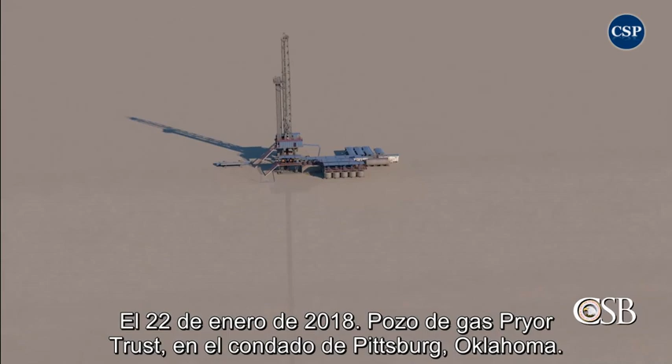January 22, 2018, the Pryor Trust gas well in Pittsburg County, Oklahoma. The well was operated by Red Mountain Operating, LLC, which contracted the Patterson-UTI Drilling Company to drill the well.

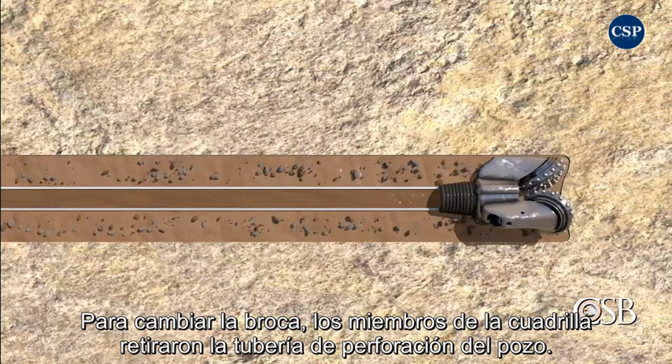In order to change a drill bit, crew members removed the drill pipe from the well. Approximately 3.5 hours later, a blowout and rig fire occurred, killing 5 workers.

Industry best practices recommend having 2 protective barriers in place at all times during drilling operations. But our investigation into the incident at the Pryor Trust well found that both of those barriers failed. The safety management system utilized at the well was simply not effective, and the result was a catastrophic blowout and fire.

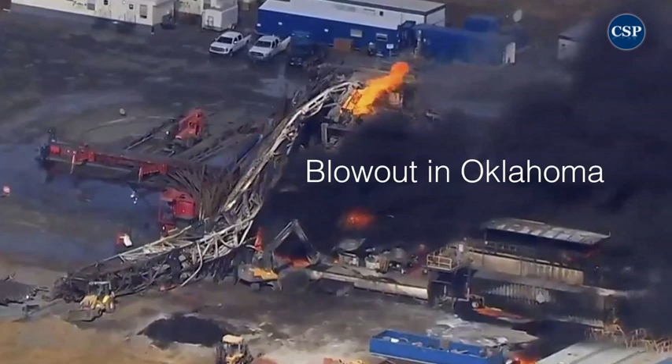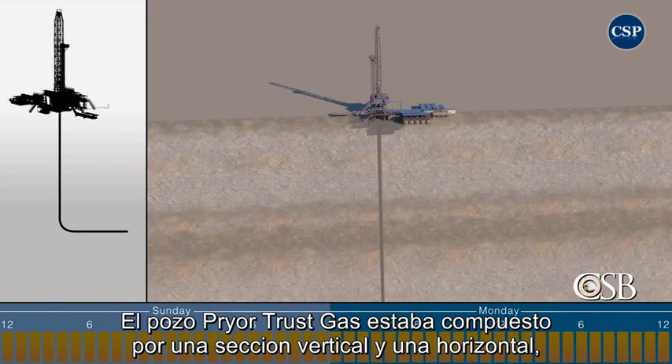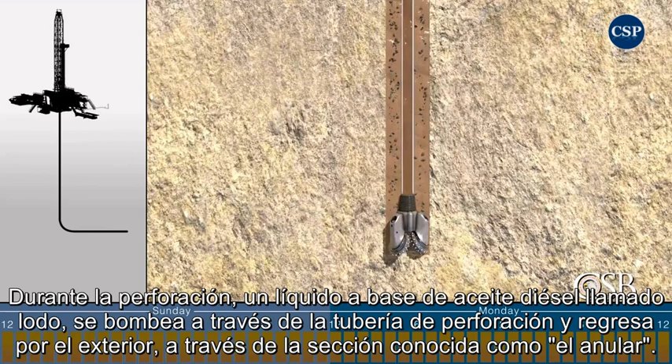The Pryor Trust gas well was comprised of vertical and horizontal sections being drilled to reach underground natural gas in the Woodford geological formation. During drilling, a diesel oil-based liquid called mud is pumped down through the drill pipe and back up through the area of the well outside of the drill pipe, called the annulus.

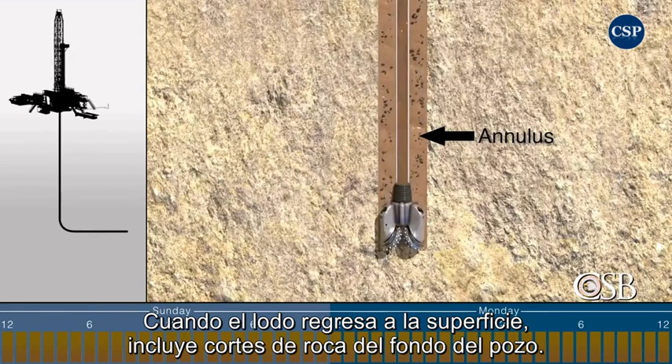When mud returns to the surface, it includes rock cuttings from the bottom of the well. Mud, however, has another important function. It is designed to add pressure to the well so that gas within the exposed geological formation is unable to enter the well during drilling.

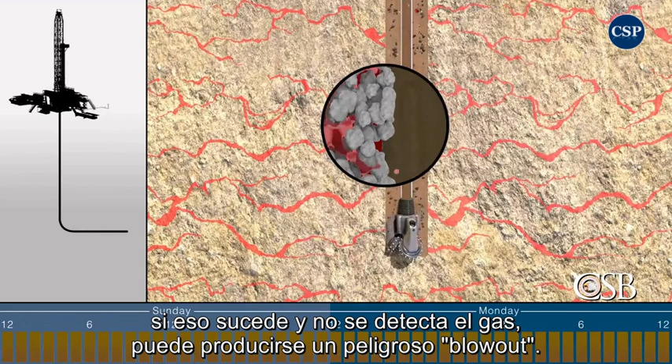If that happens, and the gas is not detected, it can lead to a dangerous blowout. On January 21, 2018, Patterson crew members had been drilling the well for 10 days under the supervision of 2 contracted representatives from Red Mountain. They were drilling the horizontal section of the well.

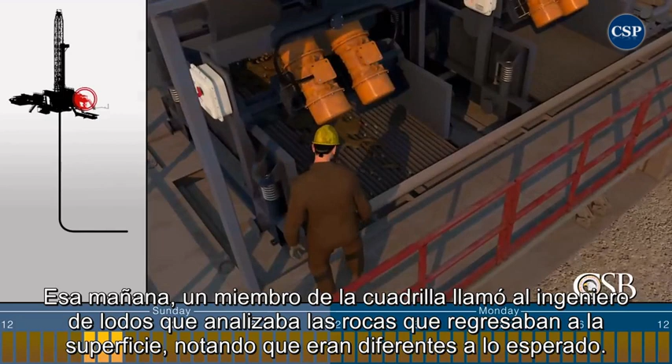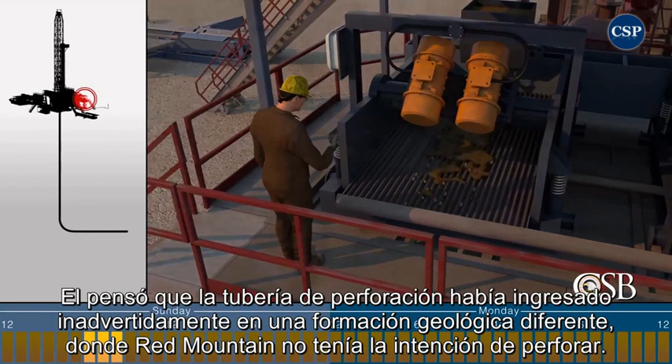That morning, a crew member called a mud logger studied the rocks returning to the surface and found they were different than expected. He believed the drill pipe had inadvertently entered a different geological formation where Red Mountain did not intend to drill. Shortly after, gas started to escape from mud returning to the surface.

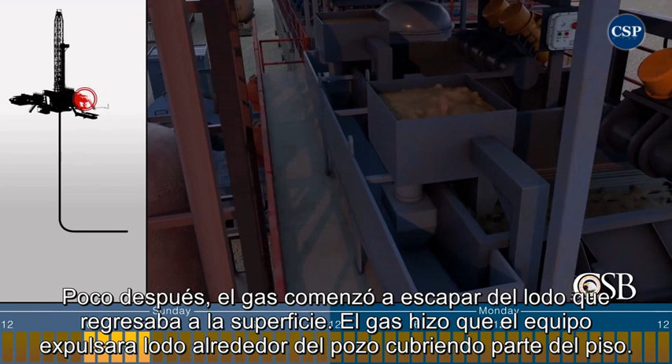The gas caused mud to spit out of equipment near the well and cover a portion of the rig. Around 11 a.m., the drilling crew adjusted piping so that mud returning from the well was routed to a piece

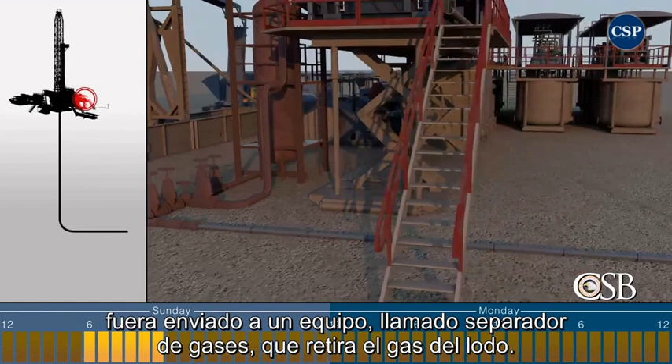of equipment called a mud gas separator that removed the gas from the mud. The separated gas was then routed to a flare to safely burn it.

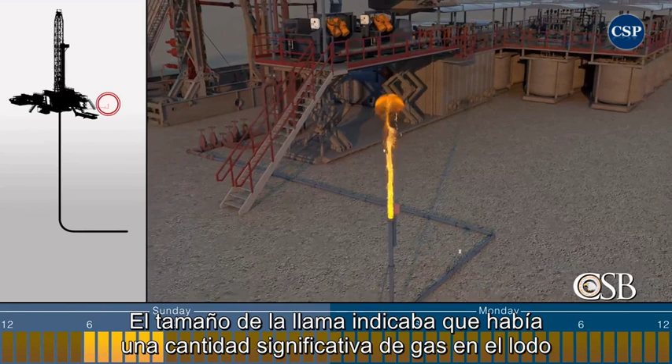The size of the flare indicated that there was a significant amount of gas in the mud and that the well had likely become underbalanced, meaning that pressure from the mud was not keeping gas out of the well as intended. The crew continued drilling underbalanced until 3:30 p.m.

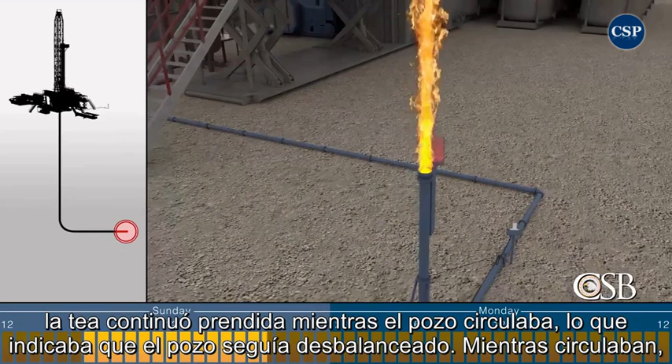when they stopped because the drill bit had become worn and needed to be replaced. The crew first circulated the well for 3 hours by pumping mud down the drill pipe and up the annulus. The flare continued while the well was circulating, an indication that the well remained underbalanced.

While circulating, the Red Mountain representatives discussed how to remove the drill pipe from the well in order to replace the drill bit. The process to remove a drill pipe is called tripping.

During any tripping operation, mud is pumped into the well to replace the volume of drill pipe being removed, which prevents gas from flowing into the well.

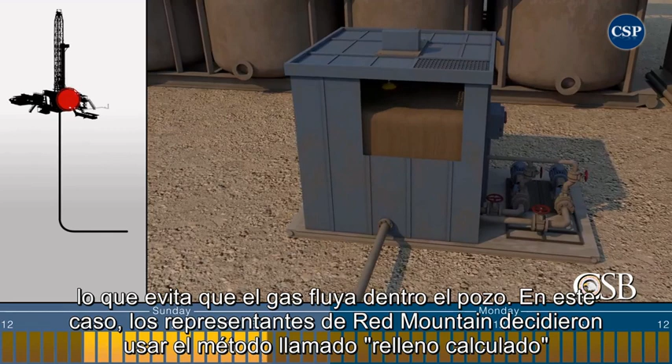In this case, the Red Mountain representatives decided to use a tripping method called calculated fill, which involved periodically pumping a calculated amount of mud into the well as the drill pipe was removed. They believed this method would keep the well contained if gas entered during the operation.

But it was not a standard tripping method during normal drilling, so no one on the Patterson crew had performed it before, and they had no written procedure. The crew started removing the drill pipe at 6:47 p.m.

The CSB found that while tripping the drill pipe from the horizontal section of the well, not enough mud was pumped and gas entered the well.

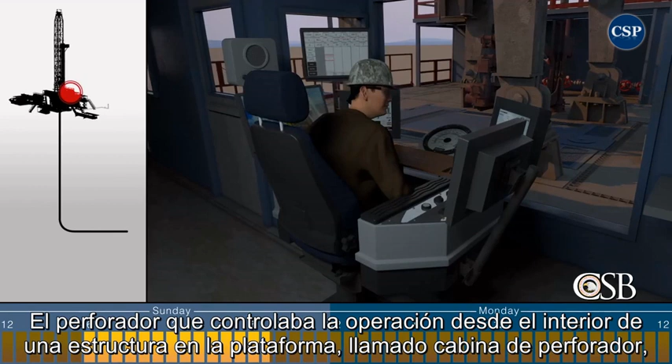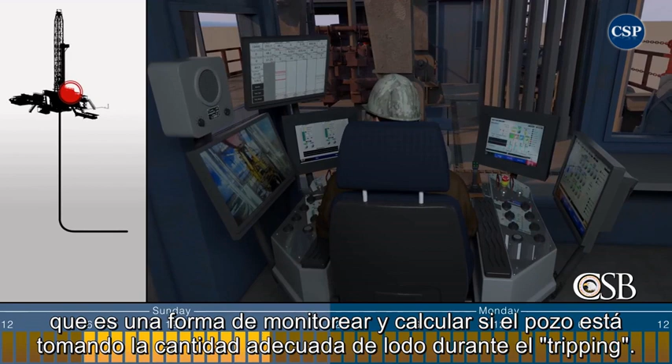The driller, who was controlling the operation from inside a building on the rig called the driller's cabin, did not see the discrepancy. That is because he had not been sufficiently trained on a new electronic version of a trip sheet, which is a form used to monitor and calculate whether a well is taking the proper amount of mud during tripping.

As a result, he was unable to see that a significant amount of gas continued to enter or expand within the well, causing pressure in the well to increase and mud to backflow into a tank at the surface called the trip tank. In fact, pressure at the surface of the well had increased so much that the centrifugal pump the crew was using was no longer able to pump mud against the pressure of the well.

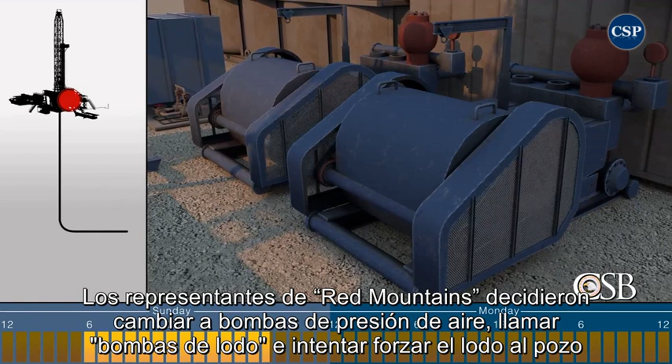Red Mountain's representatives decided to switch to higher pressure pumps, called mud pumps, to try to force mud into the well. They believed that the pressure applied by the new pumps would push any gas out of the well. But by the time the drill bit reached the top of the curve in the well, the CSB found that, unknown to drilling crew members, 20 barrels of gas had entered or expanded within the well.

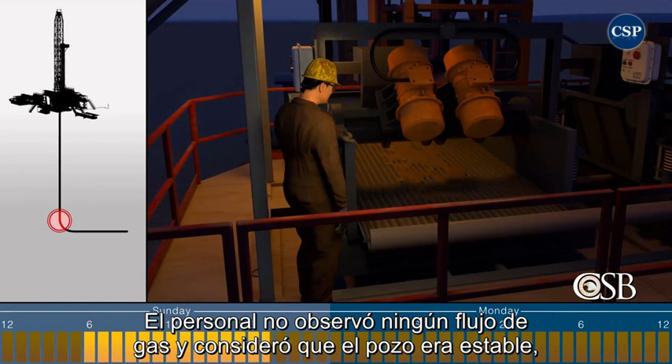At that time, the drilling crew performed a 45-second flow check to see if gas was flowing in the well. The crew did not observe any flow of gas and believed the well to be stable, but the CSB determined that the flow check was inadequate.

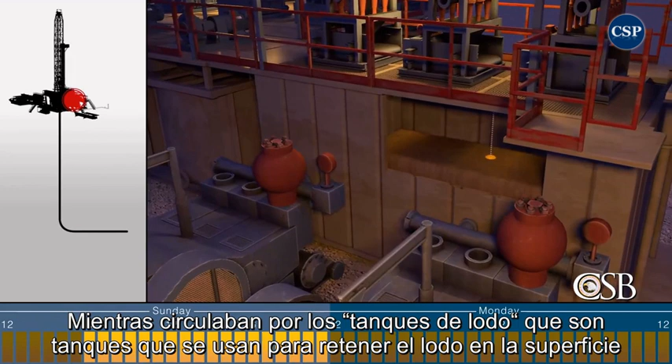At 11 p.m., the drilling crew again circulated the well. While circulating, the rig's mud pits, which are tanks used to hold mud at the surface and are equipped with level sensors, gained 14 barrels of mud when they should have remained stable. This meant that the well gained approximately 14 barrels of gas, which caused the mud to escape at the surface.

But the night shift driller had turned off the alarm system before the tripping operation, and no alarm sounded, so the large gain went unnoticed.

Red Mountain's representatives then decided to pump a weighted volume of mud, called a pill, into the well, meant to generate enough pressure to prevent gas from entering the well.

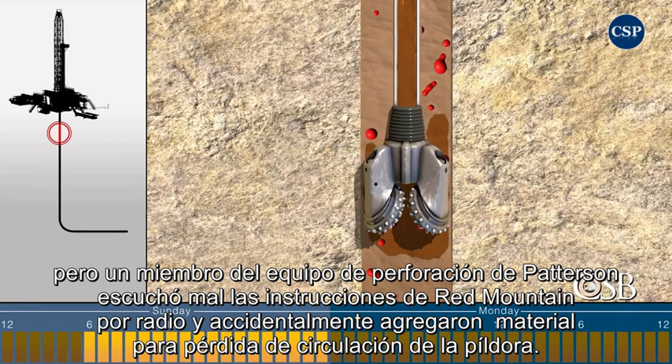But a Patterson drilling crew member misheard Red Mountain's instructions over the radio, and they accidentally added lost circulation material to the pill. This material is designed to clog breaches in the well and is not intended to be in weighted pills. Although the mistake was discovered, the pill containing the lost circulation material was pumped down to the bottom of the drill pipe, clogging it.

By 1:12 a.m. on January 22nd, the crew started to remove the drill pipe from the vertical section of the well, this time using the typical industry tripping method called continuous fill, where mud is pumped continuously into the well as the drill pipe is removed.

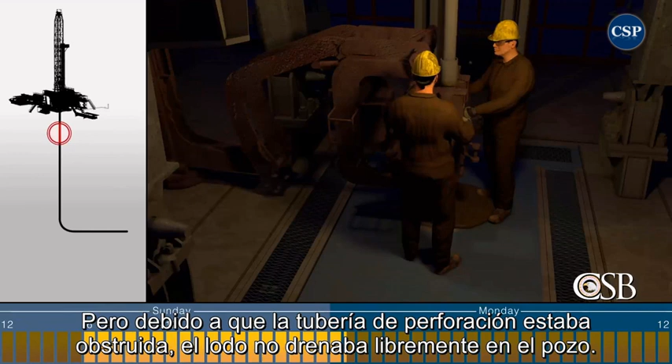But because the drill pipe was clogged, the mud was not freely draining into the well. The crew attempted to pump a weighted slug of mud into the drill pipe to push the clogged mud out, but this was not successful.

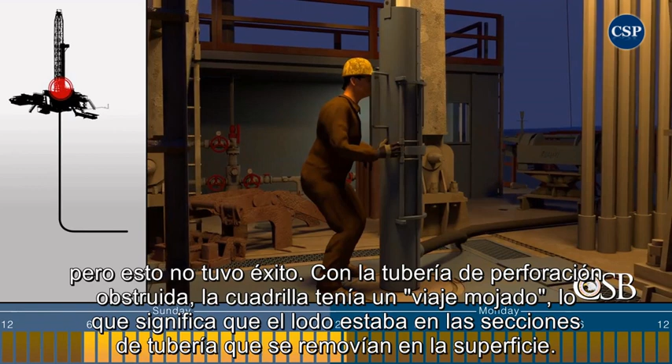With the drill pipe plugged, the drilling crew had to trip wet, meaning mud was in the pipe sections being removed at the surface. The drilling crew used what is known as a mud bucket to collect the mud from the drill pipe, which they drained into the trip tank.

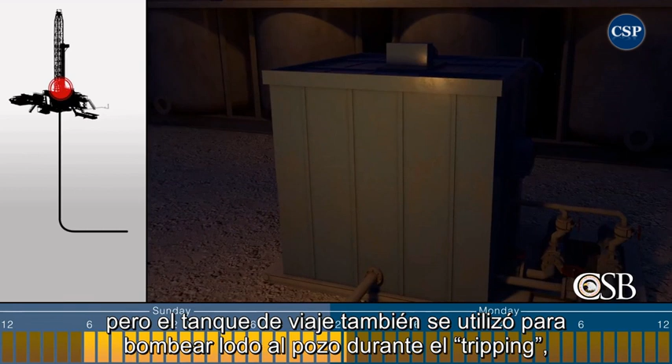But the trip tank was also used to pump mud into the well during tripping, so the trip tank volume started to fluctuate as mud was pumped out to the well and drained in from the drill pipe. The fluctuations confused crew members, and they did not realize that while the drill pipe was removed from the vertical section, the well gained another 23 barrels of gas.

When the bottom hole assembly, which is equipment at the end of the drill pipe that includes the drill bit, was near the top of the well, the crew finally removed the plugged part of the drill pipe. For the next hour, they tried to clear the clog.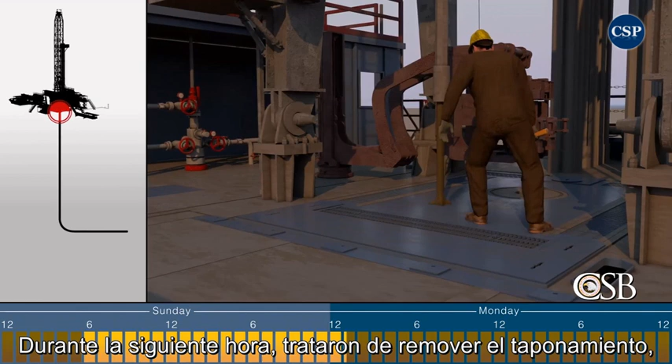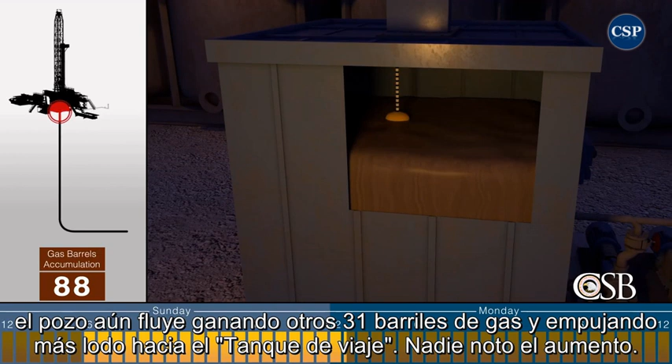But at that time, and during a subsequent shift change, the well was still flowing, gaining another 31 barrels of gas and pushing more mud into the trip tank. No one saw the gain.

At 6:10 a.m., the crew lifted the bottom hole assembly out of the well and closed the blind rams on the blowout preventer. They prepared a new bottom hole assembly for testing.

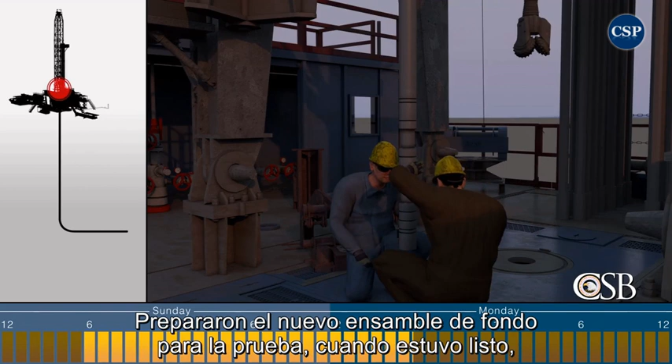When it was ready, a drilling crew member checked a pressure gauge on the rig floor to see if it showed pressure in the well, a safety precaution used before opening the blowout preventer. The pressure gauge showed no pressure.

But at 7:57 a.m., when the blind rams were reopened so the new bottom hole assembly could be lowered into the well, 5 barrels of mud surged to the mud pits.

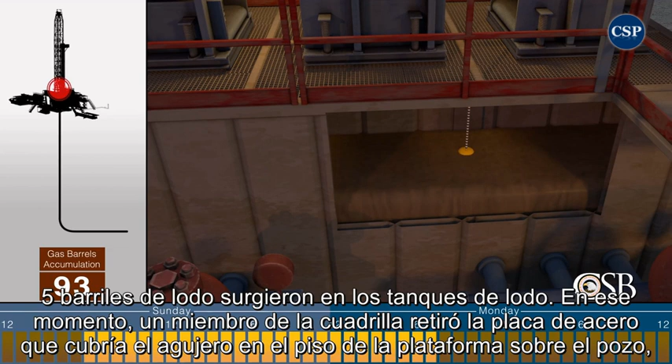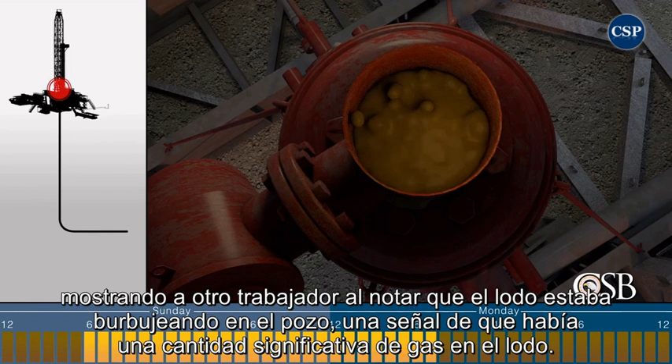At that time, a crew member pulled away the steel plate that had been covering the hole in the rig floor over the well. He waved over another worker who saw mud bubbling in the well, a sign that there was a significant amount of gas in the mud. That worker later told the CSB that he does not know if the mud bubbling was communicated to the driller.

Between 7:57 a.m. and 8:35 a.m., while the drilling crew was testing the new bottom hole assembly, the mud pits gained another 102 barrels of mud, a very large volume. This significant gain likely displayed on the driller's data screen, but the day shift driller also chose to turn off the alarm system, and it is unknown if the driller saw this dangerous gain.

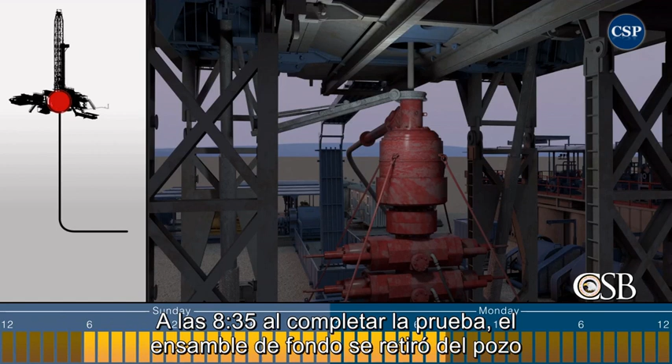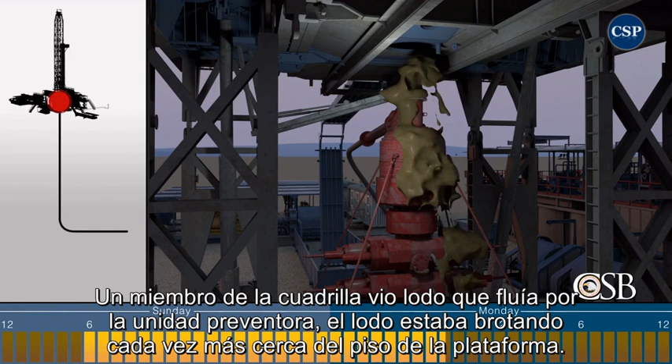At 8:35, with testing complete, the bottom hole assembly was removed from the well, and the mud pits gained another 12 barrels of mud, for a total influx of 207 barrels of gas into the well from the start of the tripping operation. A crew member saw mud flowing up out of the open blowout preventer stack.

The mud was shooting up steadily, getting closer to the rig floor. The crew member told the driller, and the driller responded that he was going to close the blind rams, but he never made it. Seconds later, mud blew upwards out of the well in what is known as a blowout.

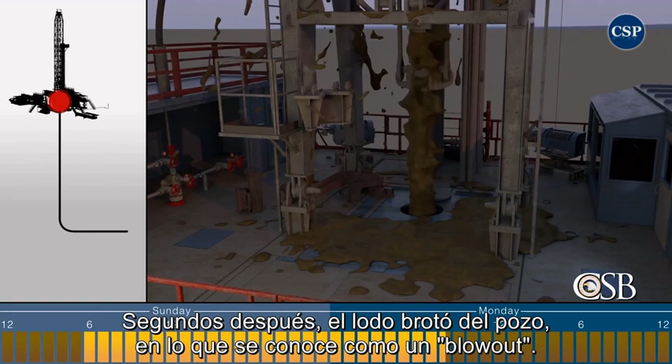2 workers on the rig floor ran into the driller's cabin, where 3 other workers were already located. The gas and mud then ignited, causing a massive fire. All 5 people in the driller's cabin were killed.

The blowout continued for hours until a well control services company was able to shut in the well around 4 p.m.

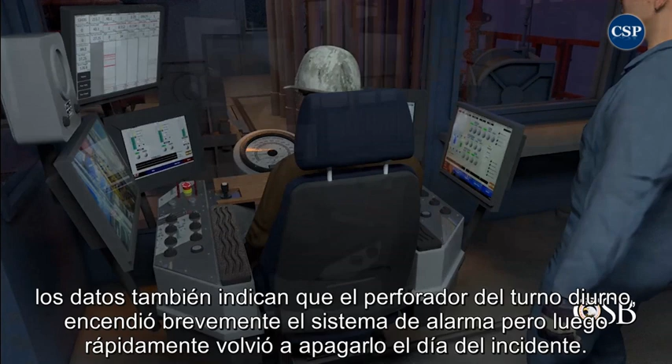During its investigation, the CSB found data indicating that on the evening prior to the blowout, the night shift driller turned off the entire alarm system. Data also indicates that the day shift driller briefly turned on the alarm system, but then quickly turned it off again on the day of the incident. Other than that short period, the alarm system was off for 14 hours, leading to the blowout.

We were not able to conclusively determine why the drillers turned the alarm system off. A possible reason is that the alarms were perceived as a nuisance or an annoyance. In fact, we found that had the alarm system been on, most of the alarms that would have activated during the 14 hours leading up to the incident likely would have been irrelevant to detecting the problems in the well.

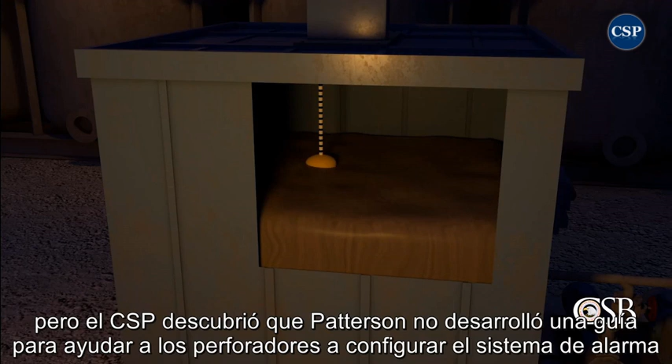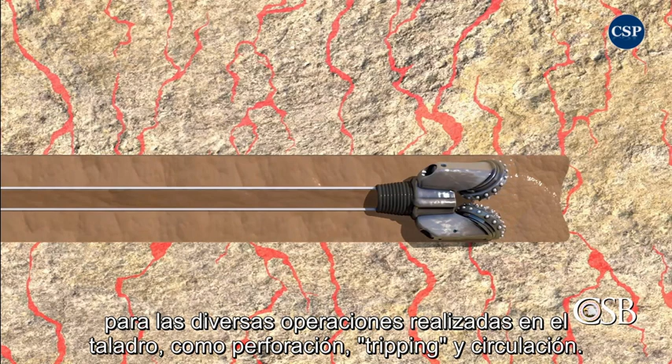For an alarm system to be effective, it must be configured so that the driller only receives alerts to conditions that require attention. But the CSB found that Patterson did not develop guidance to help drillers set the alarm system for the various operations performed on the rig, such as drilling, tripping, and circulating. Instead, to manage the alarm rate, both drillers apparently elected to simply turn off the alarm system.

We concluded that what's called a state-based alarm strategy is one way to solve this issue. For example, on a drilling rig, there could be different active alarms for each operation, such as drilling, tripping, and circulating, so that alarms critical to a certain operation do not become a nuisance when operating in a different state where those alarms are not needed.

Although there is a large body of guidance and recommendations on the design of alarm systems for hazardous operations, none are specifically targeted for the drilling industry. As a result, the CSB made a recommendation to the American Petroleum Institute to develop a standard on alarm management, specifically for the drilling industry, that addresses drilling's unique dynamic environment and provides guidance on implementing a state-based alarm system for different operating modes.

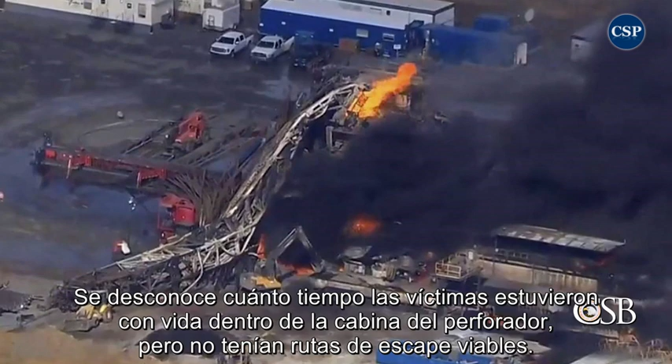When the blowout started, 2 crew members on the rig floor ran inside the driller's cabin. 3 other crew members were already in the driller's cabin, and all 5 workers were killed. It is unknown how long the victims remained alive inside the driller's cabin, but they had no viable escape routes. There were 2 exit doors from the driller's cabin, but both of those exit doors were blocked by flames.

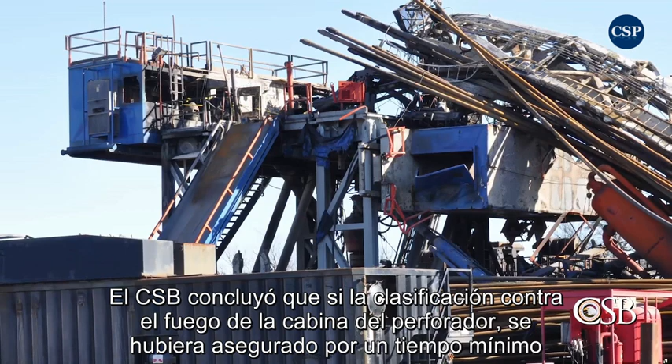After the gas and mud ignited, the CSB concluded that had the fire rating of the driller's cabin been ensured for a minimum time, with emergency escape options from the floor or from the back wall, there could have been a better chance for the workers inside to have survived this incident.

Stan Christman is a drilling expert who consulted with the CSB on the Pryor Trust investigation.

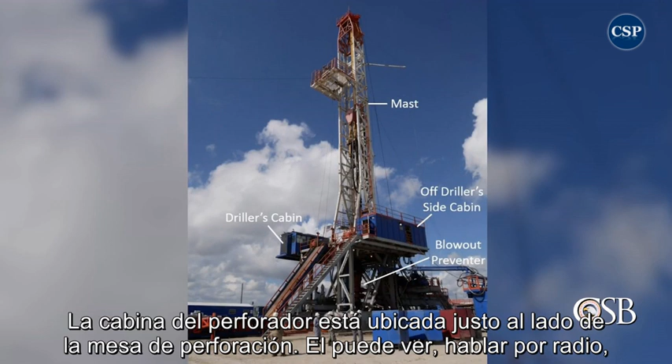On a drilling rig, the operations are controlled from the driller's cabin by the key man, the driller. And he has a crew that works for him on the rig floor. The driller's cabin is located right next to the rig floor. He can see, talk over radio, even directly to the crew and get things done.

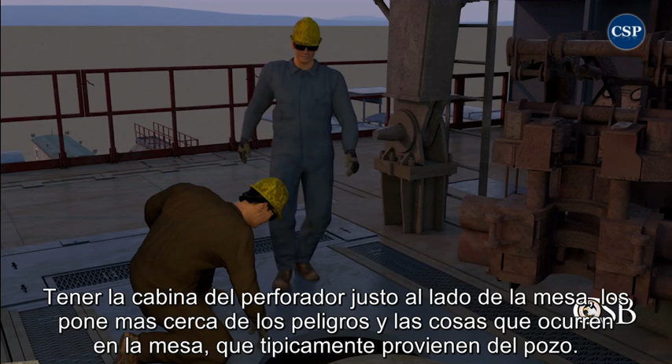Having the driller's cabin near the rig floor puts it closer to the hazards—things happening on the floor, typically from the well. These hazards are things we could probably think further about.

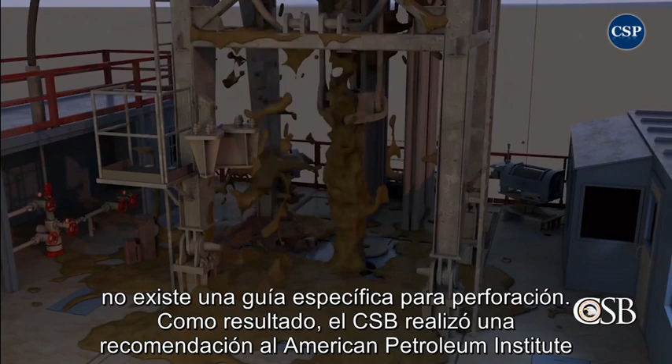Although there are best practices within the chemical industry for the location and design of control rooms, there is no guidance specific to drilling. As a result, the CSB made a recommendation to the American Petroleum Institute to develop guidance addressing the protection of onshore rig workers from fire and explosion hazards in the event of a blowout. The guidance will specifically address the design and location of the driller's cabin and establish minimum required evacuation methods from various locations on the rig.

Flow checks are a safety-critical operation used to determine if gas or other formation fluids have entered a well, which could lead to a blowout.

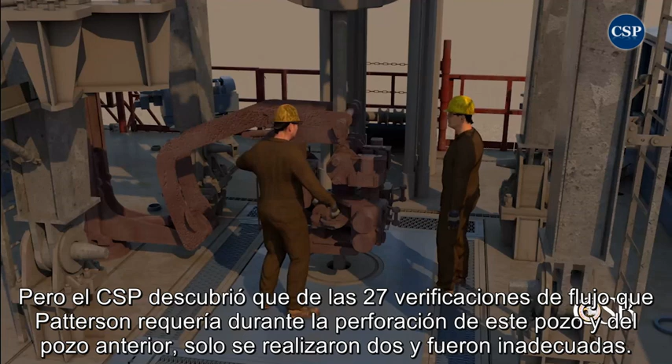Patterson policies required flow checks to be performed at various times during the tripping operation. But the CSB found that of the 27 flow checks required by Patterson during the drilling of this well and the previous well, only 2 were performed, and those were inadequate. There was a culture on this rig that accepted the non-performance of flow checks.

Performing flow checks during the tripping operation, as required by Patterson, could have identified that the well was flowing and could have prevented the blowout.

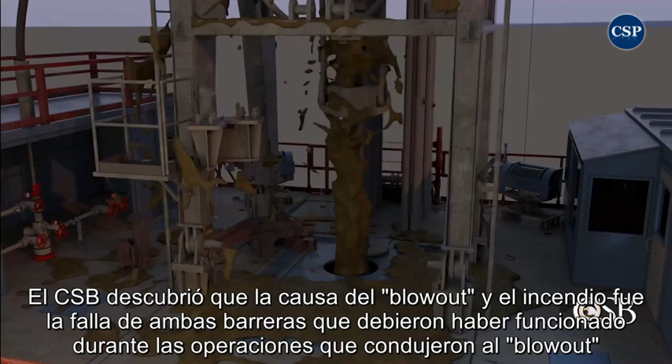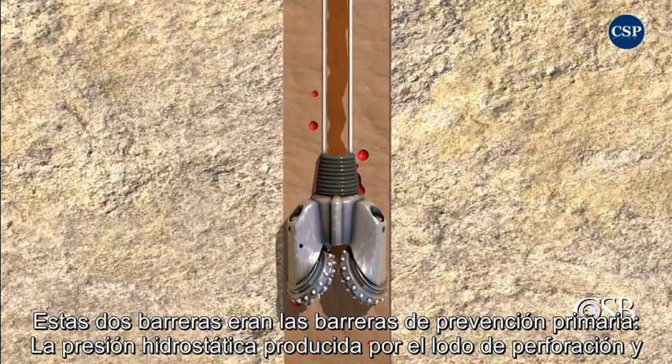The CSB found that the cause of the blowout and rig fire was the failure of both barriers that should have been in place during the operations leading to the blowout. Those two barriers were the primary prevention barrier, hydrostatic pressure produced by drilling mud, and the secondary mitigation barrier, human detection of gas entering the well and activation of the blowout preventer.

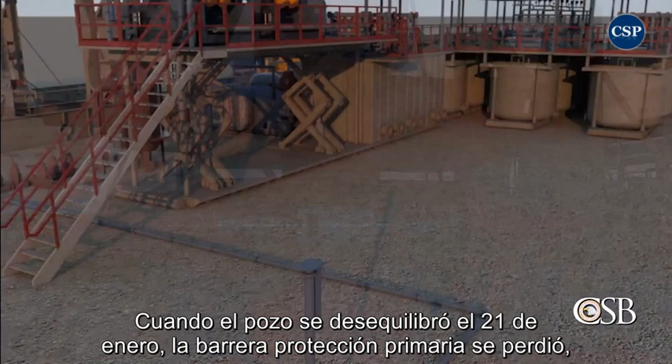When the well became underbalanced on January 21st, the primary protective barrier was lost, but work was not stopped so that the barrier could be reestablished by increasing the weight of mud, and no analysis on the loss of the barrier was performed.

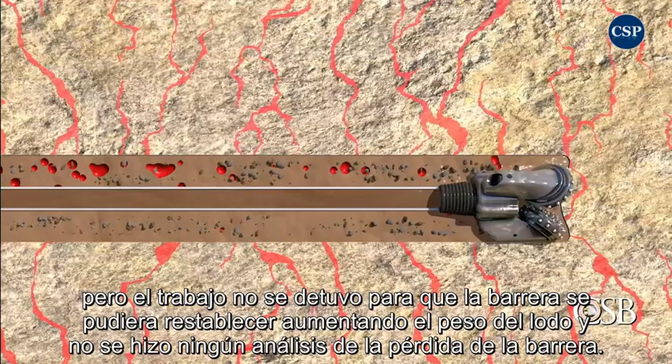We learned that Red Mountain had developed what they called a drilling prognosis, a type of well plan. But that plan did not specify what barriers were required or how to identify if a barrier was lost. We found that development of a more comprehensive plan, such as the Well Construction Interface Document, which is used more widely in offshore drilling, was not required.

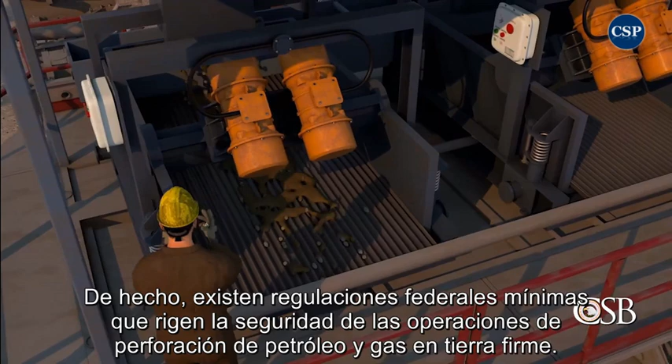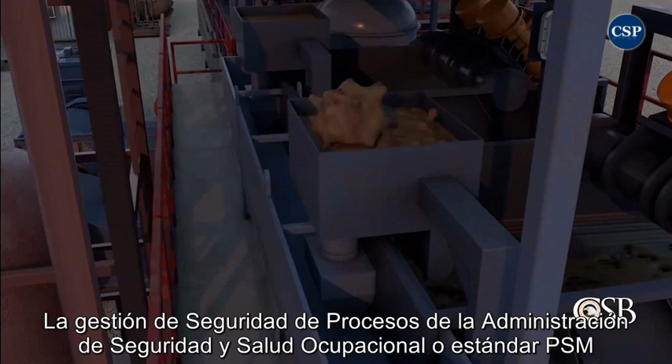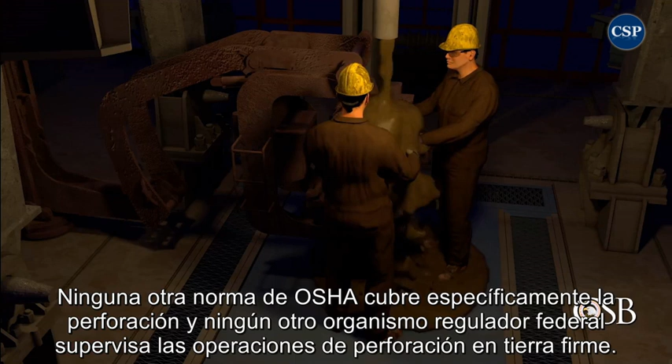In fact, there are minimal federal regulations governing the safety of onshore oil and gas drilling operations. OSHA's Process Safety Management, or PSM standard, which would require a hazard analysis of the operation, does not apply to drilling. No other OSHA standard specifically covers drilling, and no other federal regulatory body oversees the safety of onshore drilling operations.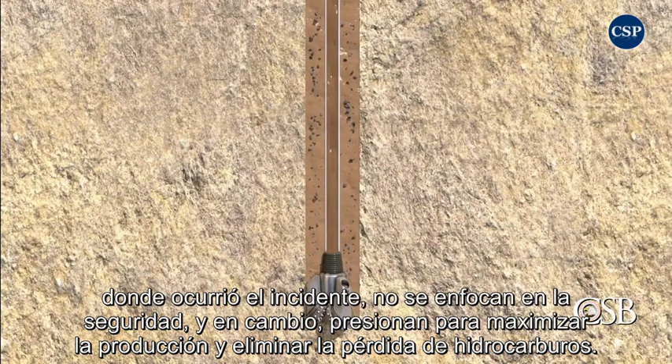With no federal safety standards for oil and gas drilling, companies are governed by a patchwork of individual state laws. During its investigation, the CSB determined that the laws in Oklahoma, where the incident occurred, are not focused on safety, and instead stress maximizing production and eliminating the loss of hydrocarbons.

The CSB believes more focused and specialized regulatory coverage, like the OSHA PSM standard for the chemical industry, is needed to better control the hazards inherent to drilling. With the requirement for a more effective safety management system, drilling companies can avoid incidents in a proactive manner, protecting both their workers and the environment.

As a result, the CSB made recommendations to OSHA to either apply the PSM standard to drilling of oil and gas wells, or develop a new standard with a safety management system framework similar to PSM that applies only to the drilling of onshore oil and gas wells.

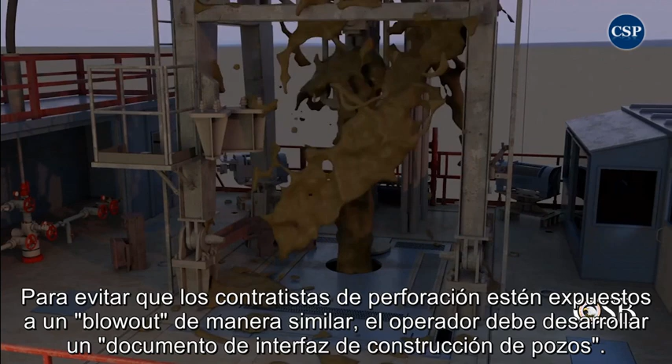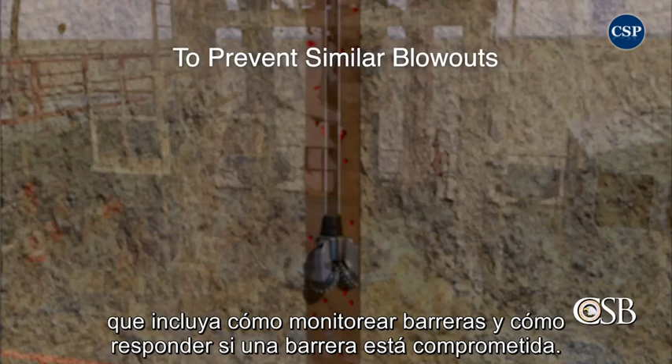To prevent similar blowouts, drilling contractors and operators should develop a well construction interface document, bridging the operators' and drilling contractors' safety systems and providing a barrier plan, including how to monitor barriers and how to respond if a barrier is compromised. Create procedures for operations, including tripping.

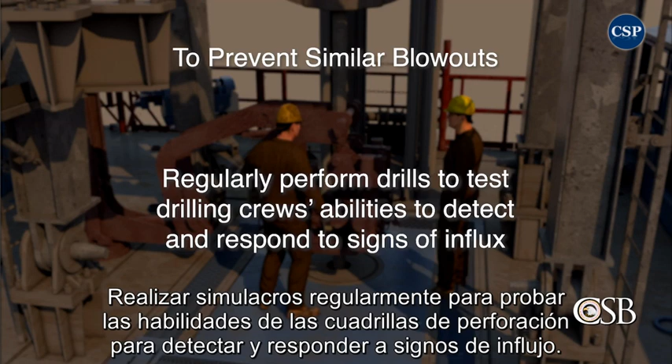Design alarm systems so that only the alarms indicating a condition needing drilling crew attention are active. Regularly perform drills to test drilling crews' abilities to detect and respond to signs of influx, and implement an indicators program to monitor and improve policy compliance rates.

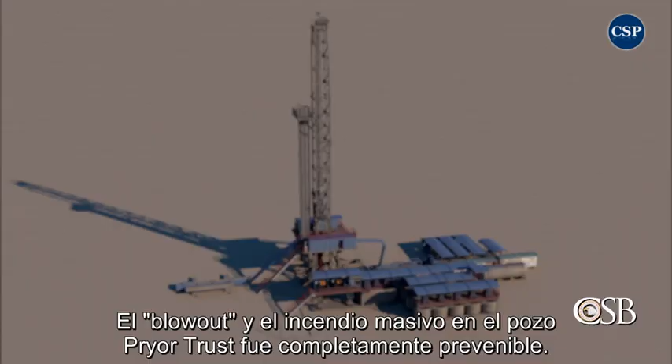The blowout and massive fire at the Pryor Trust well was completely preventable. We hope our findings and recommendations are used by the drilling industry to promote safer operations so that similar tragic incidents can be prevented. Thank you for watching this CSB safety video.